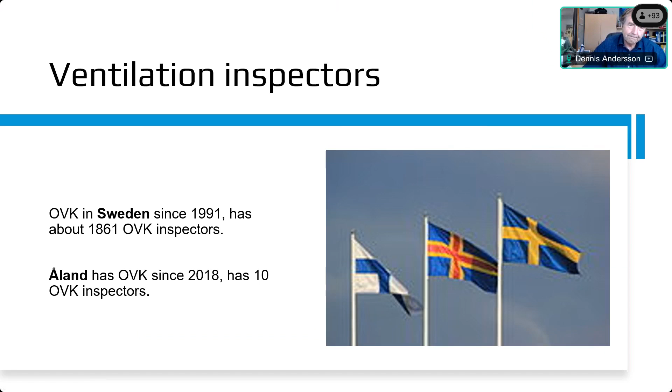The background to OVK in Sweden was that we had problems appearing in people in the form of allergies and other hypersensitivity symptoms. It was called the sick building syndrome. Among the factors assumed to contribute to ill health in the users, three factors were in focus: the building's ventilation system, the building material, and moisture in the building.

The role of the OVK regulation is to control the ventilation in buildings. The control is done before the ventilation system is taken into operation and after that on regular intervals, except for single and two family houses that are only checked once. The purpose of OVK is to secure that the indoor climate is good and that the ventilation system is functioning.

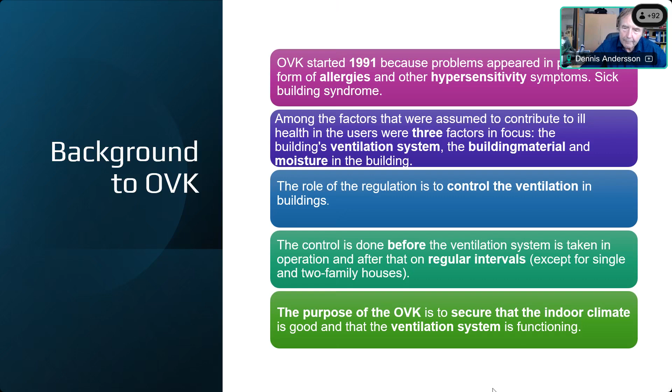Which buildings and ventilation systems are subject to OVK in Sweden? As you see here, the starting point is that most buildings must be inspected. For one and two family buildings, a recurring inspection is not required, but only an initial inspection. Some buildings and ventilation systems are completely exempt from the requirement for OVK.

As I said, one and two family buildings with natural or fan controlled exhaust ventilation should never be inspected. Farm buildings, industrial buildings like factories and so on, and last, military buildings that are of a secret nature, they should not be subject to OVK.

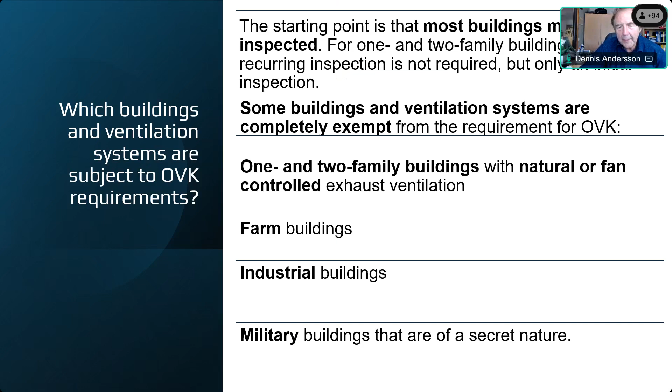We have two intervals in Sweden concerning OVK: either 3 or 6 years. The number one thing when you choose between the intervals is the function of the building. The second thing that determines is the type of ventilation system.

As you see in these tables, preschool, schools, care facilities, and other similar buildings, regardless of the type of ventilation systems, should be checked every 3 years. And apartment buildings, office buildings, staff rooms and offices in industrial buildings and the like, also 3 years.

6 years applies to apartment buildings, office buildings and staff rooms and offices that don't have fan controlled supply air. And as I said, 1 and 2 family buildings with FX, FT and FTX ventilation only need an initial installation inspection done, so no recurring inspection.

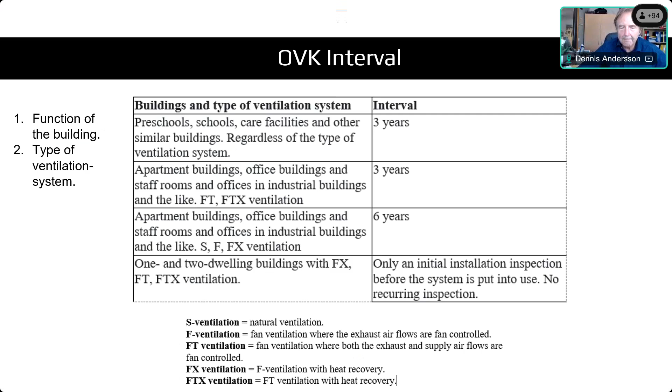How should the OVK be done? At each OVK, it must be checked that: 1, the ventilation system doesn't contain contaminants that can spread throughout the building. 2, instructions and care instructions are readily available for the persons who should take care of the ventilation system.

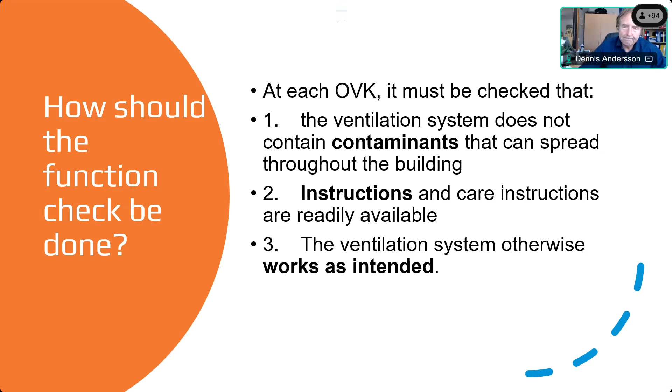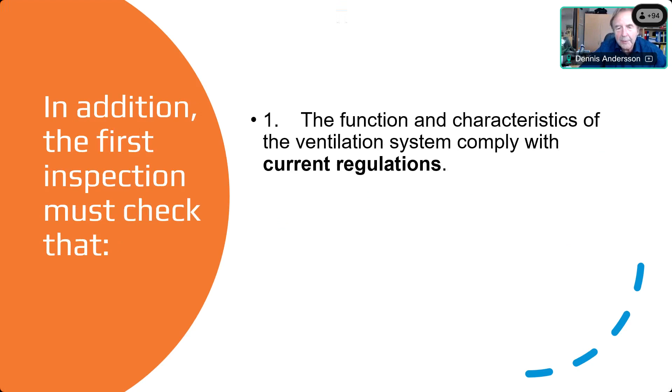And number 3, that the ventilation system otherwise works as intended when it was installed. In addition, the first inspection should also check that the function and characteristics of the ventilation systems comply with the current regulations, which means the building code when the ventilation is installed.

When you look at the periodic inspections, you should check that the function and characteristics of the ventilation systems are essentially in accordance with the regulations in force when the systems were put in use the first time. And number two...

Which is a rather big difference from the first inspection, is that on periodic inspections you should also check what measures could be done to improve energy conservation in the ventilation systems, as long as that doesn't result in deteriorating indoor climate. It's the owner of the building who decides whether to implement the energy conservation suggestions or not.

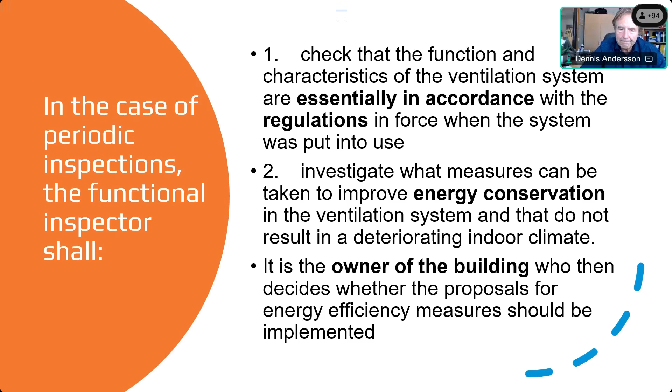It's the owner of the building who must ensure that errors and deficiencies discovered at OVK are rectified, and this should be done as soon as possible. The owner is also responsible, even between inspections, for taking the necessary measures to ensure that the requirements for the ventilation systems are met and maintained so that their essential technical characteristics are preserved at all times, because it's of vital concern for the people living and working in the buildings.

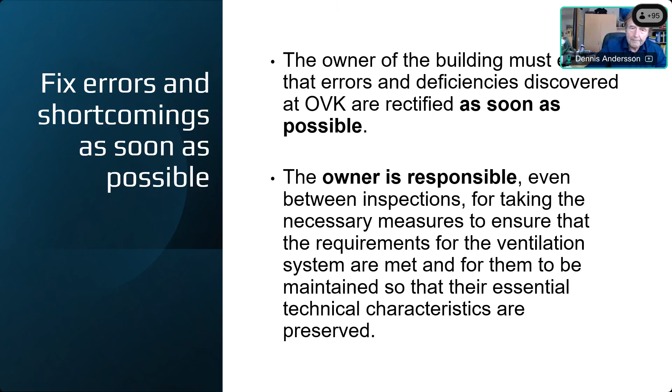It's the municipality who is responsible for control and supervision of OVK. It's the municipality's building committee that will monitor the building owners to ensure they take care of their obligations to OVK. If the owner of the building doesn't carry out the OVK, the building committee can order the owner to carry it out.

And if it appears from a protocol that the requirements for functional inspections are not met, the building committee can order the owner to investigate and rectify the deficiencies. This order may be combined with a fine.

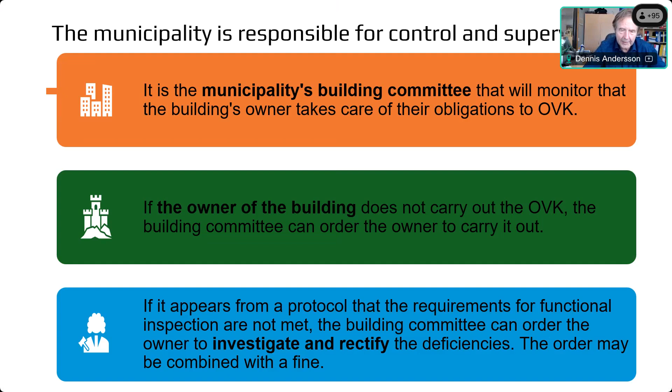It is also possible to exempt the inspection intervals. If there are valid reasons why the inspection cannot be carried out within the interval, or that it doesn't provide any intended protective function, you can apply for exemptions from the regular inspection interval. For example, it may be that the building isn't in use, or that there is a major change in direct connection with the regular intervals, making it better to wait for a new first inspection.

It may also be that it's not possible to gain access for inspection for reasons that the property owner cannot influence. For example, this was used during the COVID pandemic. It's the building committee that assesses the possibility of exemption in the individual case.

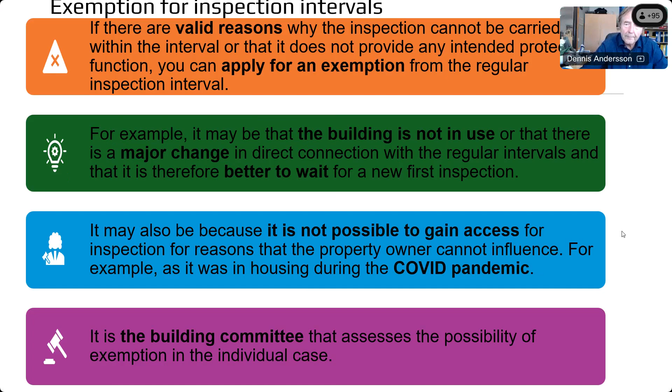OVK is done by certified ventilation inspectors in Sweden as in Åland, and the inspection must be carried out by a certified inspector. It's an expert functional inspector who is certified by an accredited certification body who will carry out the inspection.

The inspector must write an OVK protocol, and this must be submitted to the building's owner and to the municipality's building committee. The certificate must be posted in a clearly visible place in the building so everyone can see that OVK has been done, and the result of the OVK - if it's okay or not for the ventilation.

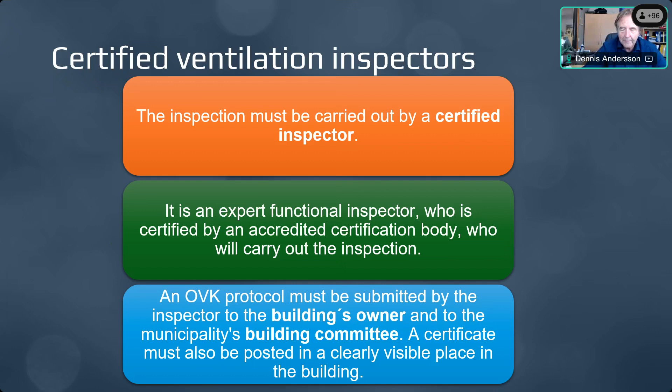As I said, I'm the secretary of FunkiS. FunkiS is an organization which most of the OVK inspectors in Sweden are members of. FunkiS is a non-profit association. It was formed in June of 1993.

Our activities are financed through members' fees and symposium fees, because we meet once a year and have a meeting and talk about ventilation and technical achievements and so on.

The membership in FunkiS is personal and can be acquired by anyone who has the authority to perform OVK, or is a municipal administrator of OVK, as well as certified ventilation adjusters.

The work of FunkiS is focused on interpreting the OVK regulations and informing our members about administrative, technical, ethical, and legal aspects, as well as giving concrete instructions that the interpretation entails.

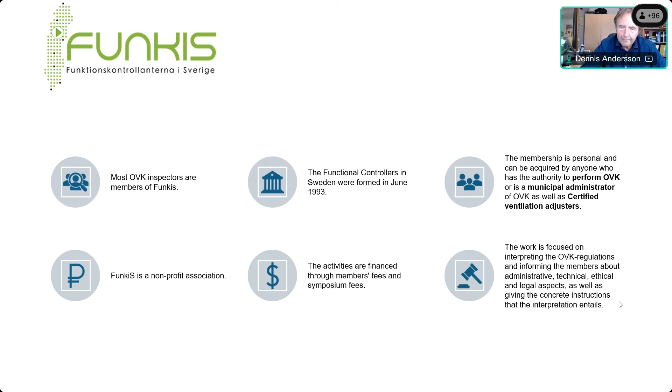I will now talk about experience from OVK in Sweden. First, from something called Modernized OVK that was done in 2017.

This report presents results on how the OVK works, both in theory and in practice, and identified suggestions for development of the OVK. To get a broad picture of OVK, interviews were made with persons related to OVK - building owners, OVK controllers, administrators at the municipality, legislators, organizations, etc. Based on this, suggestions were made for how OVK could develop to better suit its purpose.

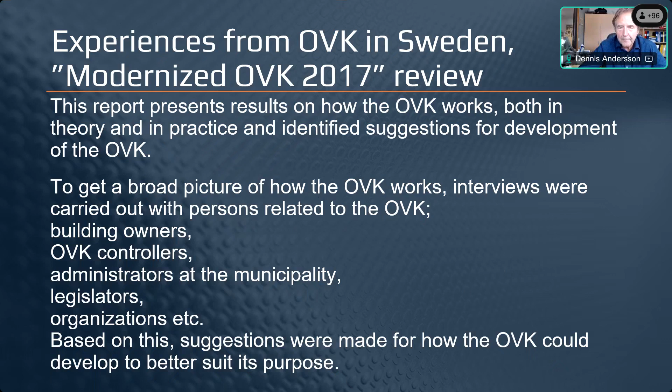The interviews show several results. First, an approved OVK is not a guarantee that the indoor environment is satisfactory, since the current use of the premises isn't always taken into account.

The study also shows that the follow-up of the OVK from the municipality is often inadequate. Moreover, energy-saving measures that should be included in the OVK are handled very differently, and the level varies considerably.

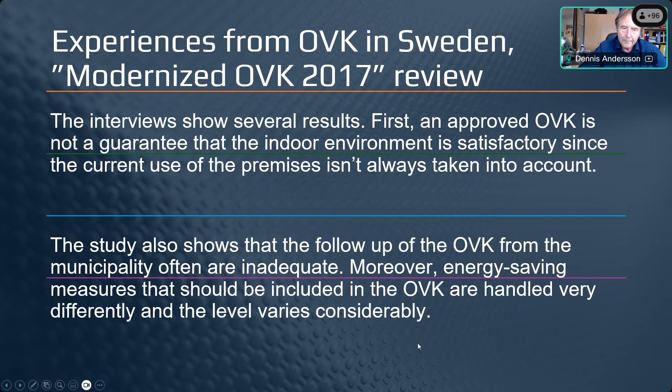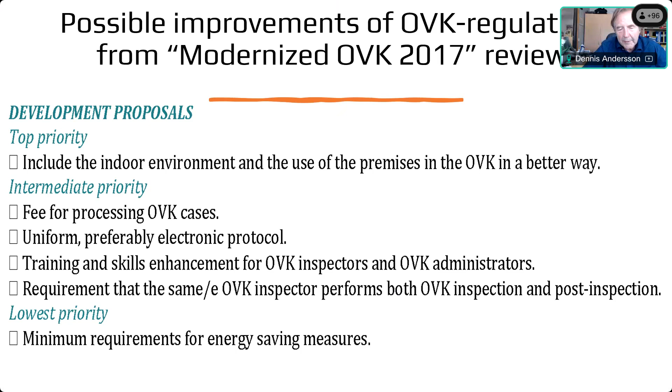Training and skills enhancement for OVK inspectors and OVK administrators should take place, and there should be a requirement that the same OVK inspector performs both the first inspection and the post-inspection when the building owner has rectified the fault discovered during the first OVK. The lowest priority was minimum requirements for energy-saving measures.

Last year, the organization called Swedish Ventilation made a review, and they found out that the most common remarks in schools were flow-affecting dirt in ductwork, too low airflows in relation to the activity for which ventilation is adapted, and lack of service and maintenance of the ventilation system.

Other findings included a larger number of pupils or children than the premises are intended for, new or changed operations meaning the ventilation is no longer adapted to the activities in each room, and demand control ventilation that doesn't work as intended.